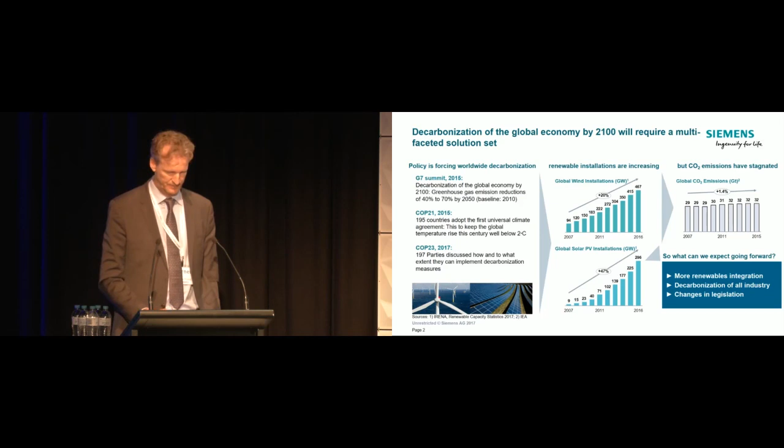So what was this case study all about? Well, as I said, it relates to the oil and gas industry. It was in the Surat Basin, on a particular application that has been in service for a couple of years already.

Siemens was tasked with undertaking a techno-economic assessment using our modeling tools as it related to coal seam gas extraction on the East Coast and how renewables could be employed through this process.

The assessment was to compare CSG gas extraction and upstream processing using power from the grid with that of using renewables and gas engines and their own gas extracted as a fuel for power generation.

It was quickly identified that the capital cost of battery storage in this particular instance, and I must say it's only for this particular plant, meant the business case wasn't going to stack up, and rather doing more of a parasitic use of their own gas to drive engines was going to get this business case to work.

Plus the use of our fisheye cloud forecasting solution for grid smoothing services as an alternative to battery storage. So this is now putting fisheye forecasting cameras to monitor cloud cover and cloud movement rather than putting batteries in for grid stabilization.

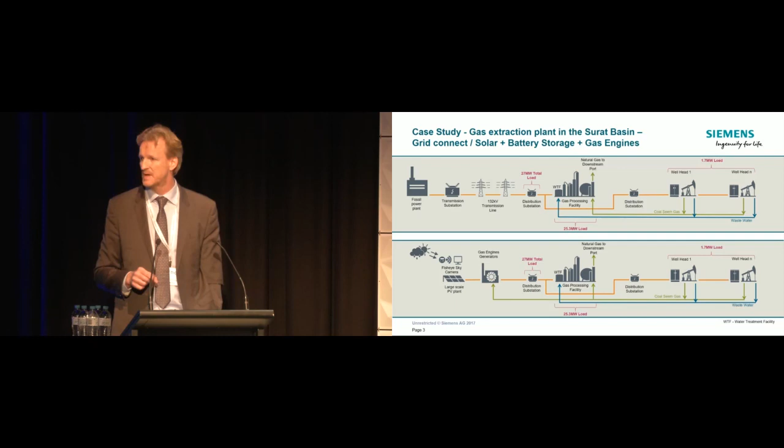So this particular software that we use to do the techno-economic assessment, this is really where we start when we get involved in a project of this nature, is to work out what's going to be the technical solution that makes sense from an economic point of view.

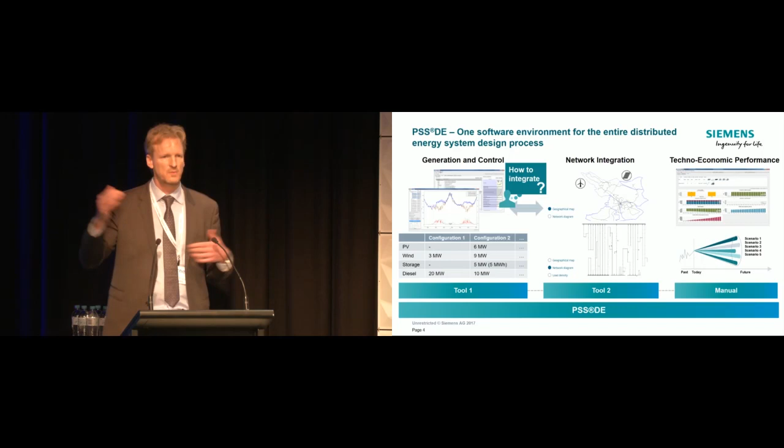And so we go through these various stages of working out what are the components that make up the generation, how are we going to integrate it into whatever network is required, and what are the economic drivers that are going to bring about value to our clients. It's a software tool where we put in all the data, and then we get results in a number of scenarios out on the other side.

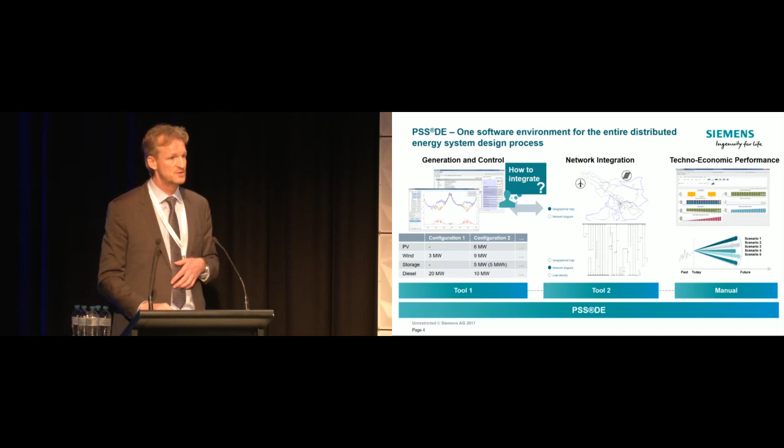The software tool used to be called Simpson. It's now called PSSDE. You may have heard of software called Homer. Ours used to be called Simpson. I don't know why.

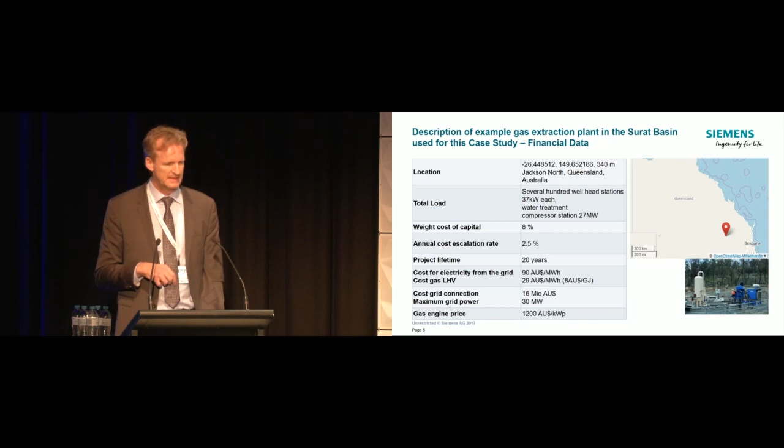So for this particular example, some of the financial data and inputs that we used: first of all, we needed to know the location, what was the irradiance in that particular area we import into our tool, what does the load look like, the single line diagram, how does that load run, what's the weighted average cost of capital, annual cost escalations, project lifespan.

What does it cost them when they buy their electricity from the grid? And what will it cost them if they use their own gas? If they're selling that gas to market at $8 a gigajoule, we want that gas to go to market. We don't want them to be burning it to produce energy to extract their own gas.

So that's really some of the data we needed to work out what makes sense from an economic point of view. The grid was not too far away from the site, it was actually close by. So a 132 kV connection at $16 million was cheap.

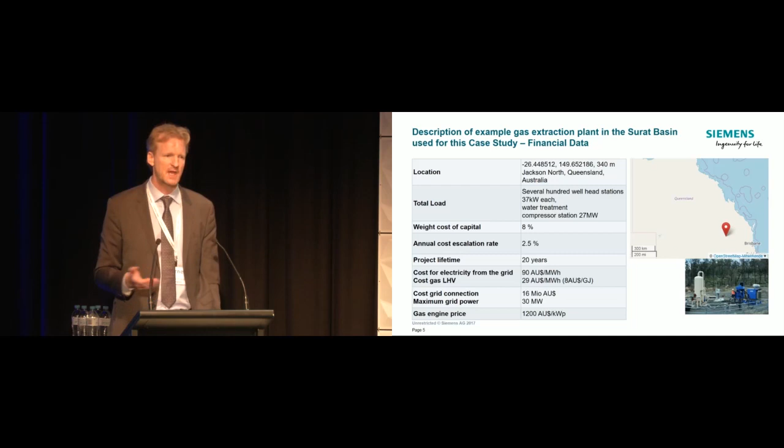So it was going to be a difficult one for us to get across the line, and this is probably why the battery didn't fit. The maximum power of this particular application was 30 megawatts, and the gas engines we would deploy came in at a capital cost of $1,200 a kilowatt.

And that's characteristic of coal seam gas extraction, and that in itself also presented a challenge, because if you start embedding renewables, what do you start doing when the load starts to decrease?

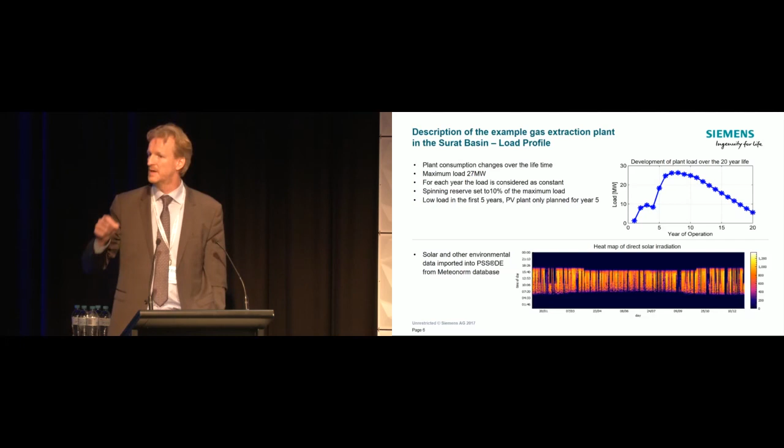Below, we extract time series from Meteonorm to get the solar data. That comes as data from a database where they collect information on irradiance, and we bring that in as data into our tool to work out what the irradiance levels are for that particular spot in Queensland.

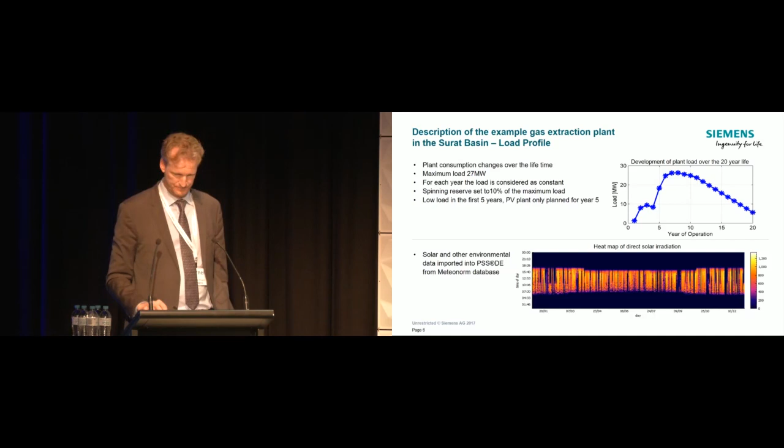So once we've got all the data in, we run the model over a 20-year period. Running that model can take 18 hours, depending on how much data's in there, and obviously the processing power of the computer.

The second day, there's no cloud cover at all. We have about 10% spinning reserve running with the engines, but most of the power is derived from solar during that period of that day.

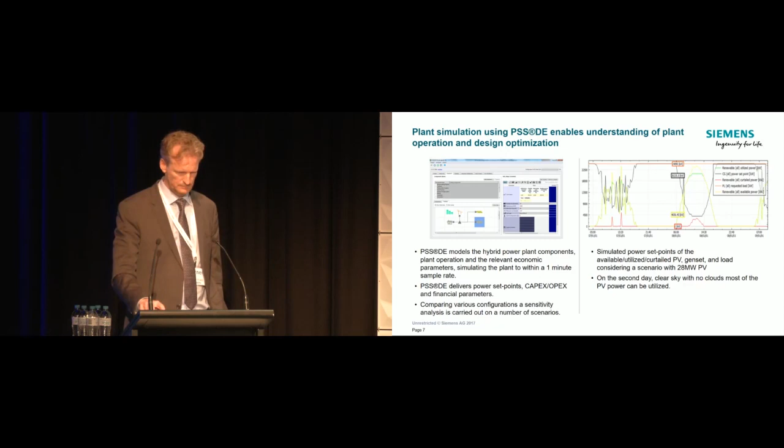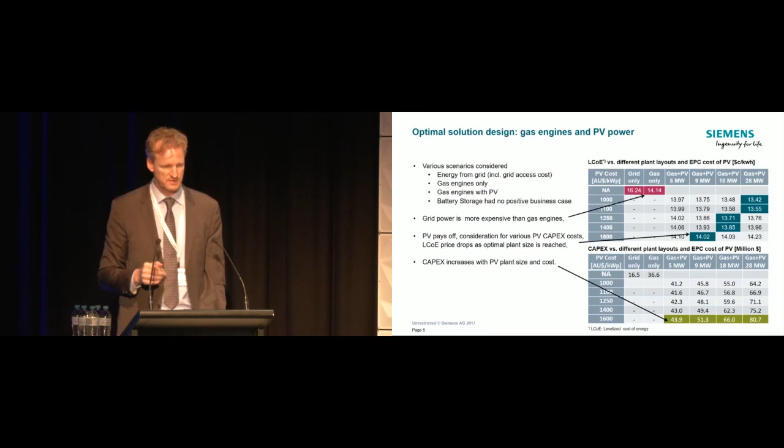So that PV is now offsetting some of their costs associated with their use of gas. The chart below is the capital cost, and you can see the more PV we put in, the higher the capital cost. But throughout the whole calculation, it's really that levelized cost of energy, taking the capex cost into account, that shows we can now produce energy and extract that gas at a lower levelized cost of energy using those gas engines.

So what's the sky camera about? As I say, we couldn't get the numbers to work with battery storage because of the capital cost associated with this. These sky cameras cost about $1,000 each, and all they're doing is, it's a fisheye sky camera, looking at the sky and looking for clouds.

When it's clear, we're running off solar. When we see clouds coming and we can forecast them coming, then what we start to do is curtail our solar and the gas engines start to ramp up. We always keep a constant 10% spinning reserve with our engines, even when it's a fully sunny day.

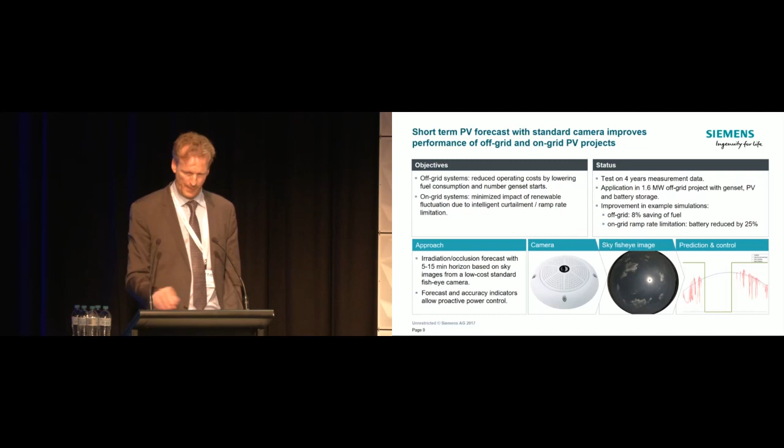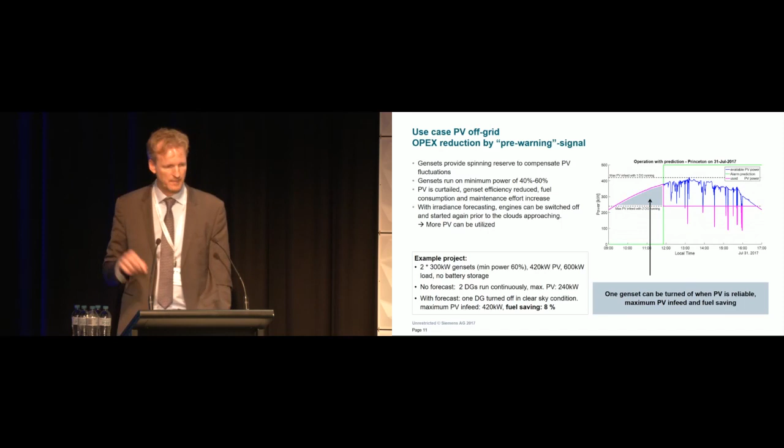So a simple use case shown here. If we've got two gas engines, 300 kilowatts each, running 24/7, and we've got some PV there, we're going to have to curtail that PV. We're probably going to run those gas engines at about 40 to 60% loaded, and we heard from the previous discussion that those engines don't like to run partially loaded. Their sweet spot is sitting at about 80 to 90% loaded. So what we want to do is switch off one of those gas engines, only have one gas engine running at its peak load, and bring in as much of that PV as possible.

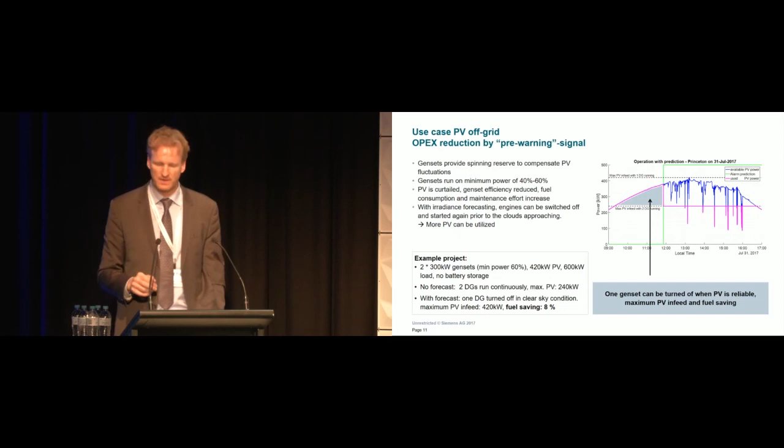With a sky camera, seeing that the sky is clear, we can do that. And if we see the clouds coming and can forecast it, then we can curtail the solar and get both engines back up and running. That would result in up to an 8% saving on fuel.

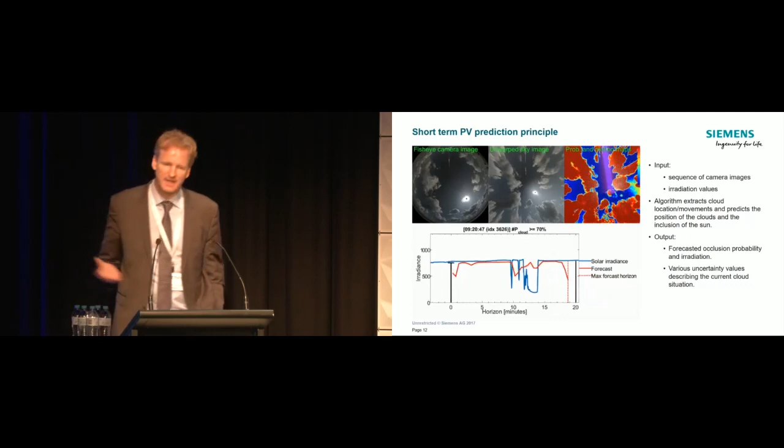So we can now begin to see cloud cover coming. It's about to hit us. Curtail solar, engines start up, and boom, we're covered. Everything's running smoothly. So it's a grid smoothing service using a low-cost camera with special algorithms and artificial intelligence behind it.

That actual camera doesn't exist anymore, unfortunately. It got taken out by Hurricane Maria in Puerto Rico last year in September. So no camera, but we got about 2 or 3 years worth of good data from that application in Puerto Rico.

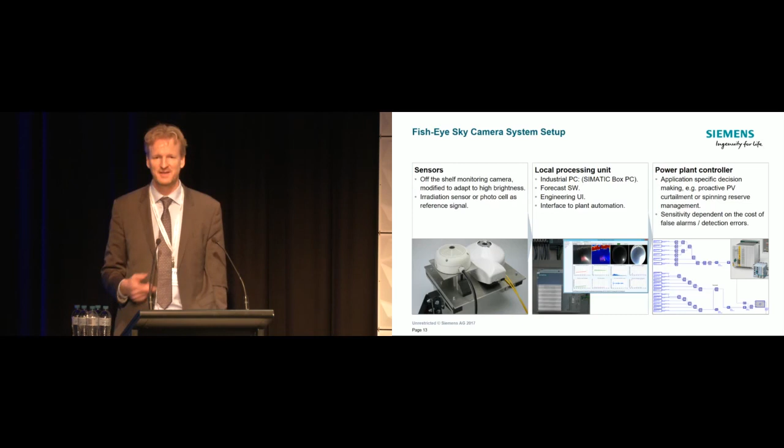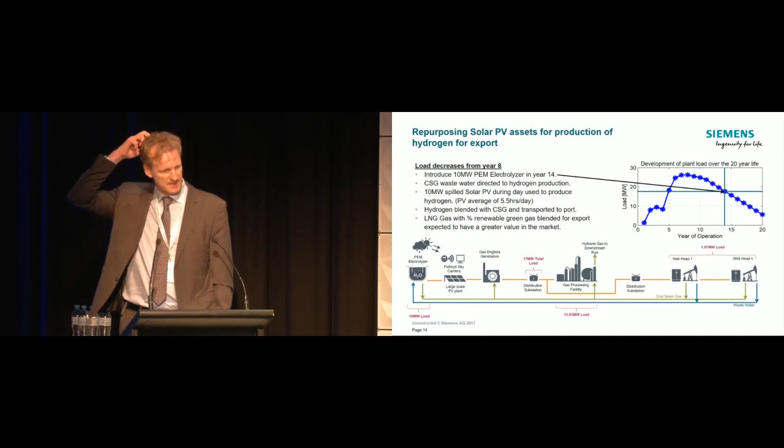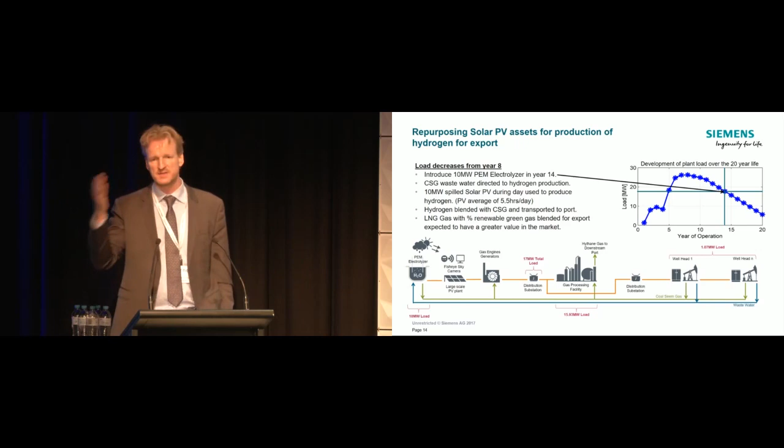So what happens now when we get to the point where our load starts to decrease on this particular coal seam gas plant? At about year 14, we've got about 10 megawatts of curtailed PV coming into the system. It's being thrown away because their load has now changed. They've got through their peak.

This is where we now potentially introduce an electrolyzer into play. A 10 megawatt electrolyzer, which is our new Silyzer 300 platform, plug that in. As part of these CSG gas processing plants, there's wastewater. We now direct that wastewater into our electrolyzer and use it. We absorb what will be curtailed, wasted energy into those electrolyzers. So now we're producing 100% pure hydrogen, 100% pure oxygen. We can take that hydrogen and inject it into their existing gas networks to port, and then they can market an LNG that's got a little bit of a green tinge to it, which might have a little bit more value.

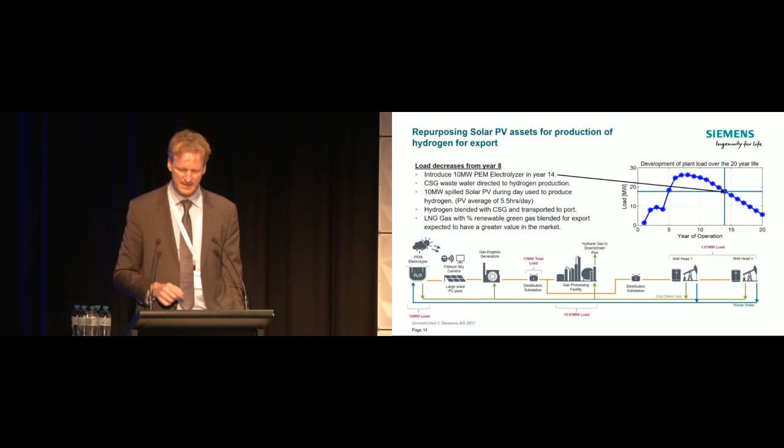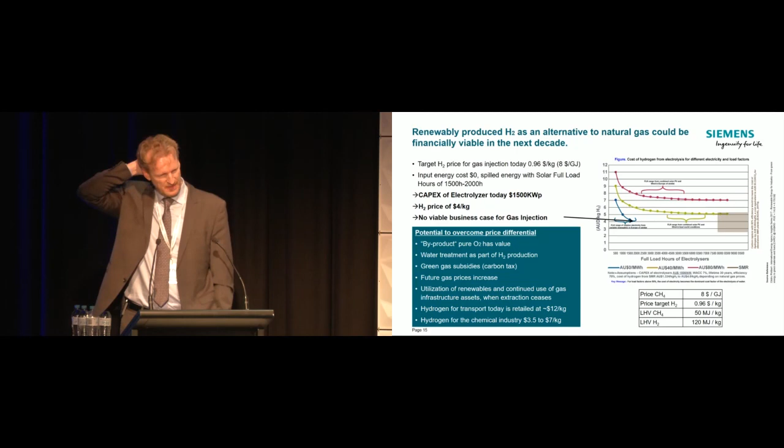So you may ask, what are the numbers, and will that make sense? There are three graphs here. The first graph shows the capital cost of the electrolyzers sitting at about $1,500 a kilowatt. So a 10 megawatt unit would be about $15 million.

And the blue line shows where all you've got is your capex cost. So your input cost of energy is spilled energy. It's wasted energy that you typically throw away, which is what applies to this particular project. Because that's 10 megawatts of energy on that CSG plant after 14 years that they're going to throw away. So that's wasted energy.

The green line shows the energy input at $40 a megawatt hour, and the red at $80 a megawatt hour, and we're probably somewhere between that in certain parts of the country.

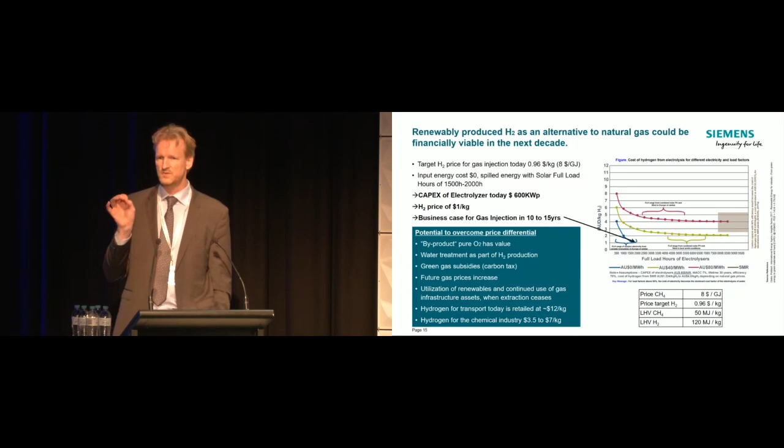Taking into account that at $8 a gigajoule today, our gas prices are likely to be sitting at about $15 a gigajoule in 10 years' time, if not higher. So that's starting to make an interesting business case as far as hydrogen is concerned, especially if you're trying to displace diesel, both for your power generation and your transport on your mining operations.

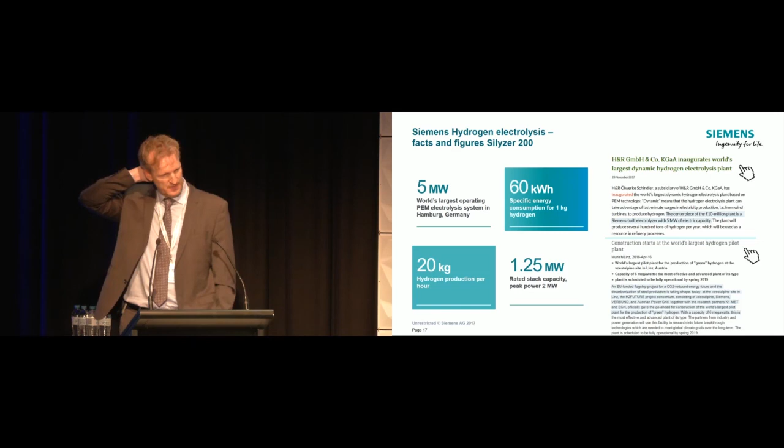This particular plant is the world's largest, that was commissioned in Hamburg in Germany. They make lipsticks from the hydrogen, so it is green lipstick. It's actually red, but it's got a bit of green tinge to it.

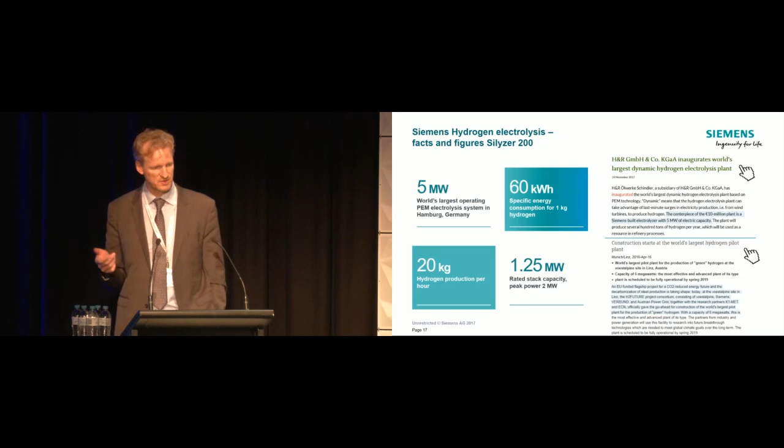That particular one, I think, is a 5 megawatt at the moment, and we're at the moment putting in a large one for a steel plant in Austria, which will be 6 megawatts, which will also be, again, the next biggest one. So some interesting projects on the go there.

There's been a lot happening here in Australia. Our first project is going into the ACT. In fact, the electrolyzers have been sitting in our workshop for almost a year now, waiting to be delivered into Canberra. They're still trying to find a site where they want to locate it. And that was in partnership with Hyundai and Neoen.

And the ACT government. The next one is going into Tonsley Park. It's going into a microgrid in South Australia, and that will be gas injection. AGIG are experimenting with this gas, and then that hydrogen will be essentially directed to transport, because this is where you're going to get the biggest bang for buck at about $12 to $15 a kilogram going into a car. But we have this chicken and egg problem, and so AGIG are looking with government to help solve that particular issue that we're in right now.

This is the Tonsley Park one, sorry, and we recently completed a study with Advisian and the South Australian government on their hydrogen roadmap, which went very well, and as a result, the Tonsley Park project's come about, and there are now talks about the biggest PEM electrolyzer project that could go ahead in Australia at about 50 megawatts in size on a solar wind farm, and you may have seen a bit of news.

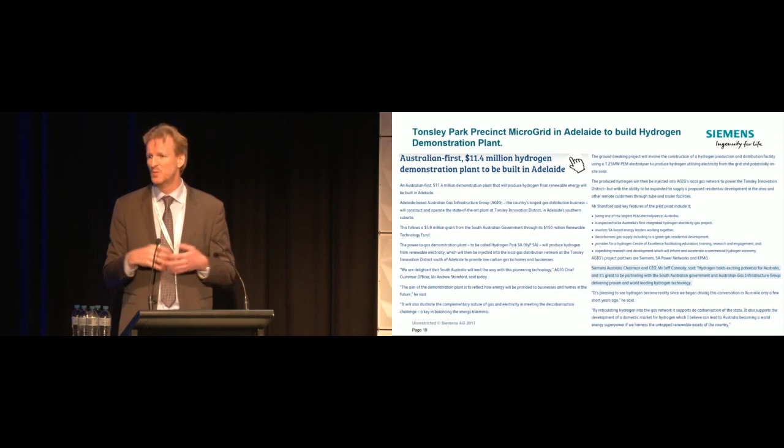Hopefully that'll go ahead. That really will put Australia on the map, because we as Australia have a unique opportunity. We've got an abundant amount of renewables. We've got a very large landmass. We've got a very small population. We're good at digging stuff out of the ground, like gas, like minerals, and exporting it. We have an opportunity to export our wind and our sunshine to markets like Japan, Korea, and start to decarbonize the rest of the world.